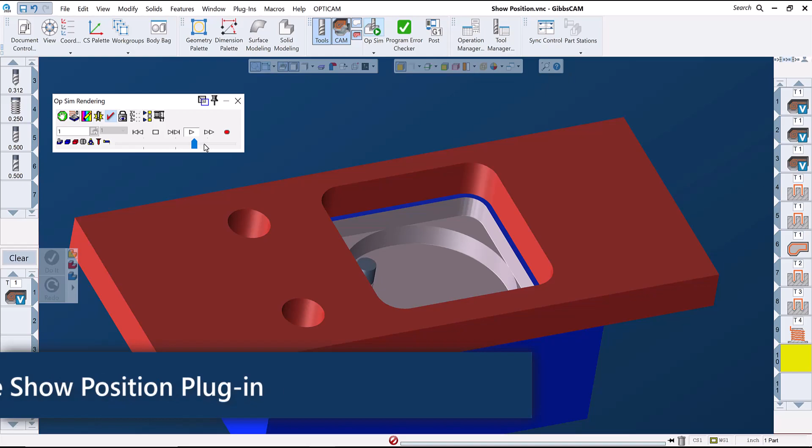In this video, we'll take a look at a tool that I've found to be helpful both in checking dimensions on a solid model as well as checking features during or after simulation in situations where you want to verify the amount of material remaining or possibly how many passes remain before breaking into another feature.

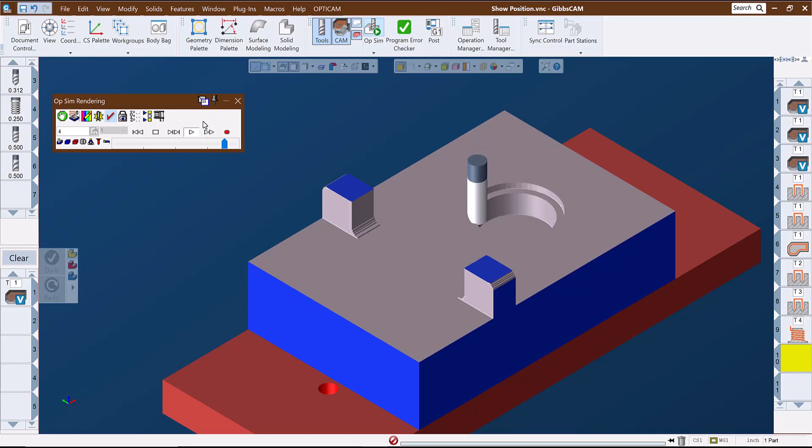This tool is a plugin called Show Position. It's located in the Plugins menu and is already available in a normal GibbsCAM installation. This is one of the tools that I like to keep handy, especially while I'm evaluating a model and planning my strategies and tooling choices.

Show Position has three static functions that you access by clicking this icon on the left end of the Show Position window, as well as a fourth function that activates only while a simulation is actively running. With the simulation running, the current position of the tool in the program relative to CS1 is actively displayed in the Show Position window. Let's take a look at those three static functions.

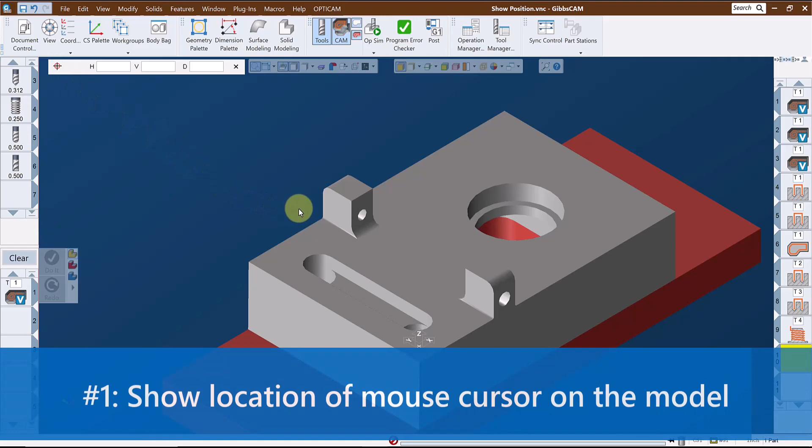The first function returns the location of the mouse cursor on the model. The horizontal, vertical, and depth values, which in the XY plane would be X, Y, and Z values, of the cursor on the model will populate this dialog when the mouse is clicked. These values can be reviewed or, if needed, copied and pasted into other dialogs.

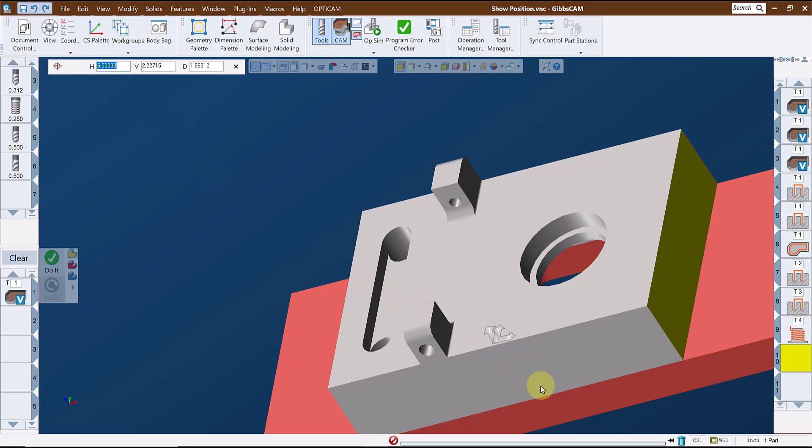This can also be very handy on the OpSim or MachineSim model where we can even pull values in process. I could stop the simulation partway through and check the location of a particular face at a specific point in the toolpath.

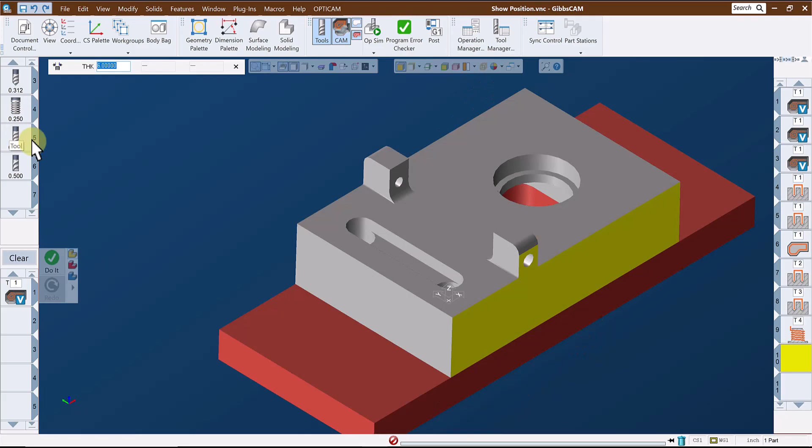The second function in Show Position is thickness. When I click on the model or the sim model, the software calculates a linear measurement from the point I click on normal to the face until it reaches another face, and returns the distance between the two faces, again measured perpendicular to the face. This is a quick, easy way to check the thickness of a section of the model.

I think it would be more common to use this on flat surfaces since if you click on a hole, for instance, you are unlikely to hit the exact quadrant and the measurement is always normal or perpendicular to the point on the surface where you click. This function can also be useful with the rendered model if you need to check the position or thickness of features during or after the simulation.

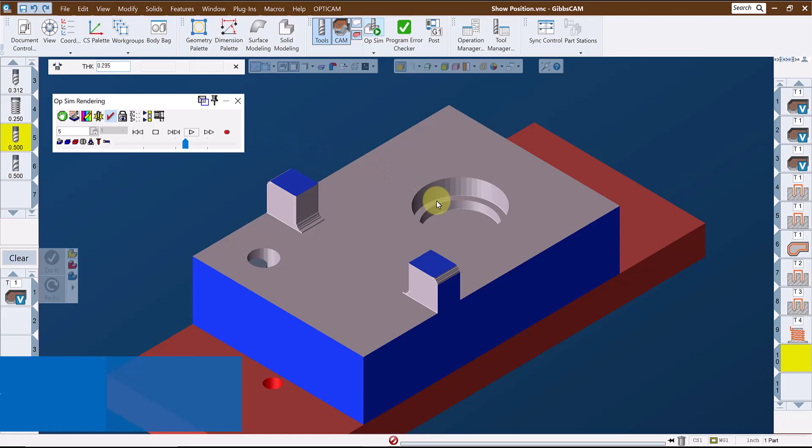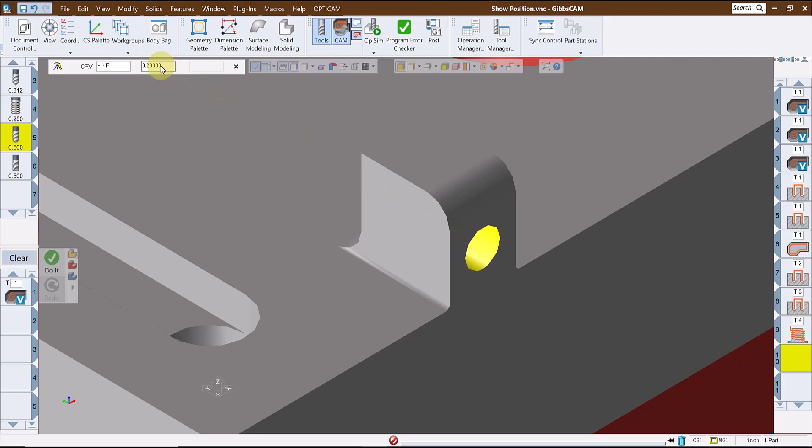The third function of Show Position is curvature. This is one of the tools available to analyze the size of a radius on a solid model. It's very handy to quickly check a fillet size, a radius size in a corner, or hole sizes. Of course, the value returned is the radius of the face, so in the case of a hole, you would double that value to get the diameter.

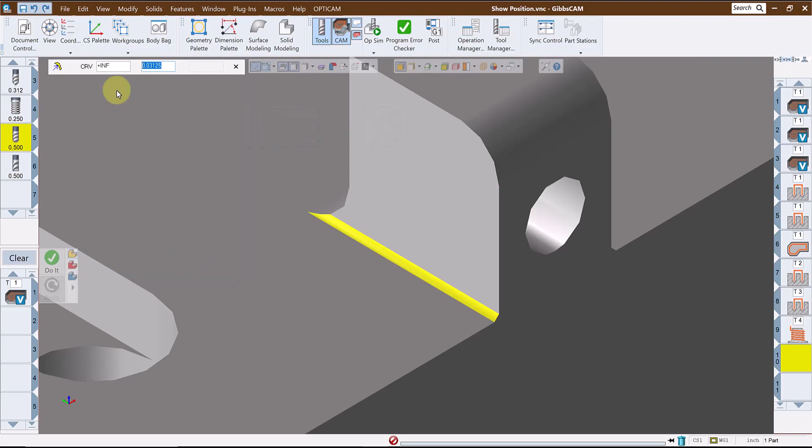Again, the values that are returned when you use Show Position can be copied and pasted to other windows if you wish. So, possibly in setting up my tooling, I know that the end mill I'm creating needs to be able to finish this fillet. If I wanted to, I could capture that radius, copy the value to the clipboard using Control-C or by going to the Edit menu and selecting Copy, and then paste that value into the corner radius field of the tool using Control-V or by going to the Edit menu and selecting Paste.

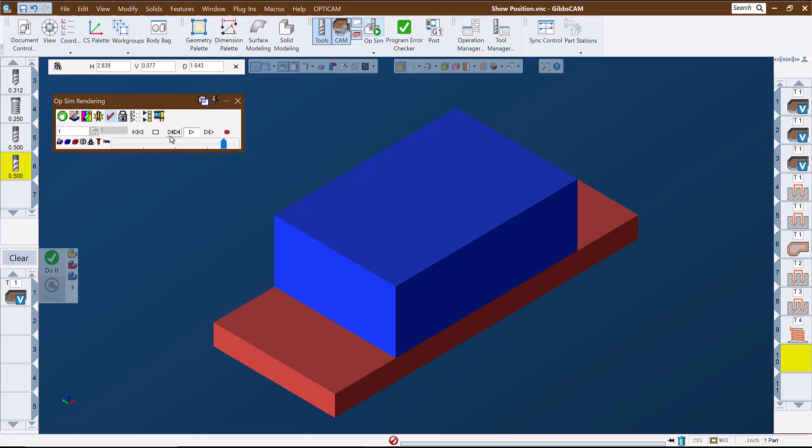In this video, we've looked at using the Show Position plugin as a tool that is helpful in checking various features of a model prior to creating toolpath, as well as checking values on the simulated part, either mid-simulation or after simulation completes, whether you create the toolpath based on a model or based on geometry.